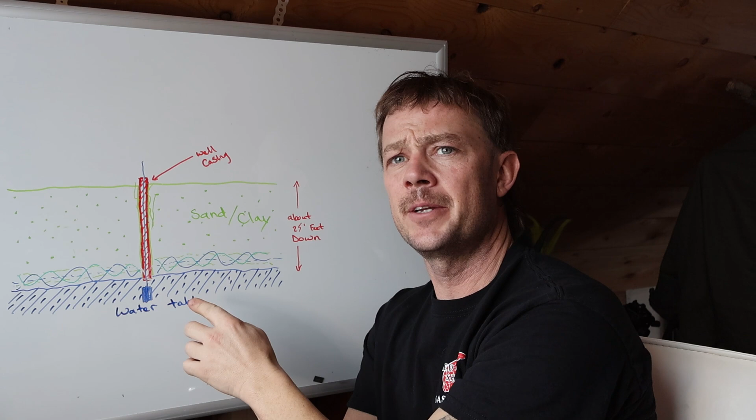The green is the sand and the clay, or earth, and the red indicates the casing. So the red is the 4-inch casing that I put into the earth at the end of this video. The blue indicates the water table, and where you see the blue and green mixed together, that's right at the top of the water table where the sand and water are just starting to mix. That's where, when you start boring into the earth with the manual post hole auger, it starts sloughing. And as soon as you get into the water table, it's next to impossible to get anything else out. You can only go down so far into the water table, and that's it.

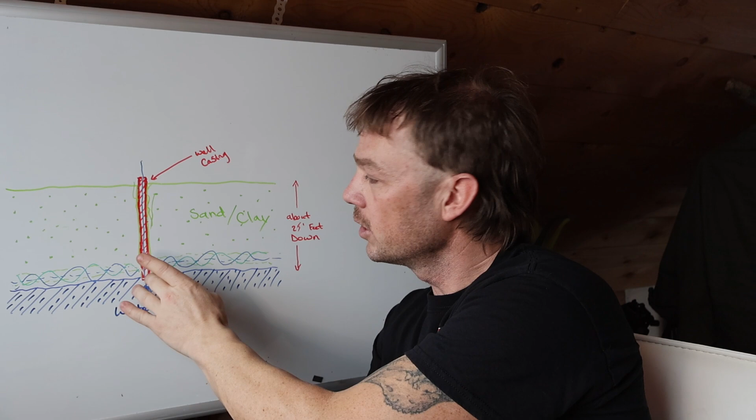So once we bored all that earth out, which was around 20 feet, we put the well casing in, indicated here by the red. The next step, once the well casing has been put in, is to decide what kind of pump system you're going to put in.

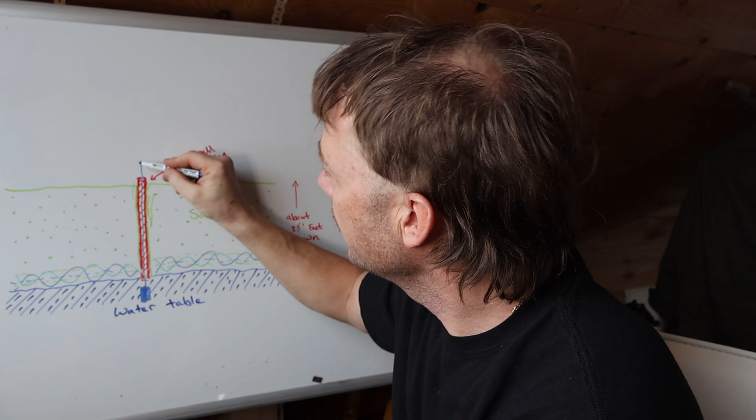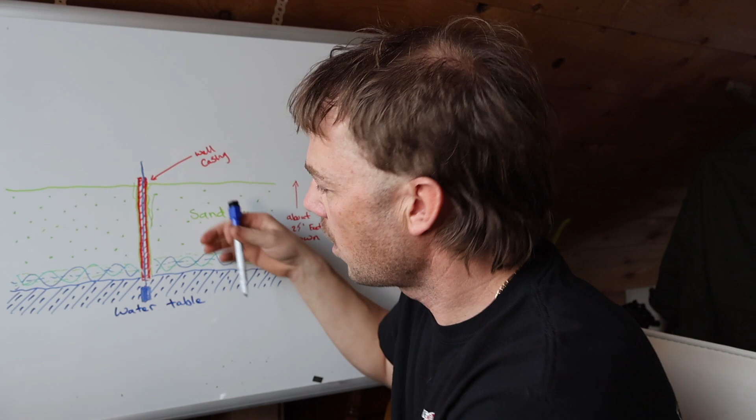I have a jet pump system here, which is a sucking pump. With that kind of system, you would use a sand point. I'm going to use this blue marker to indicate the sand point. It's going to be pushed into the well casing, it just slides down. I think it's 1.25 inch pipe, and a sand point is about 24 inches long. It looks like a big steel sharp point with some mesh around it, which allows water to go into the sand point through the sand.

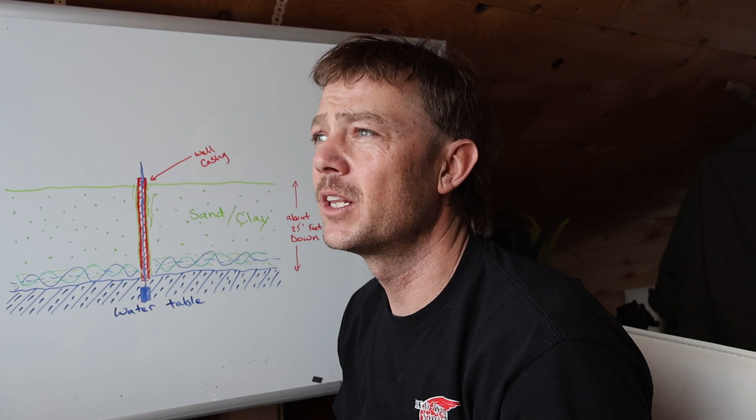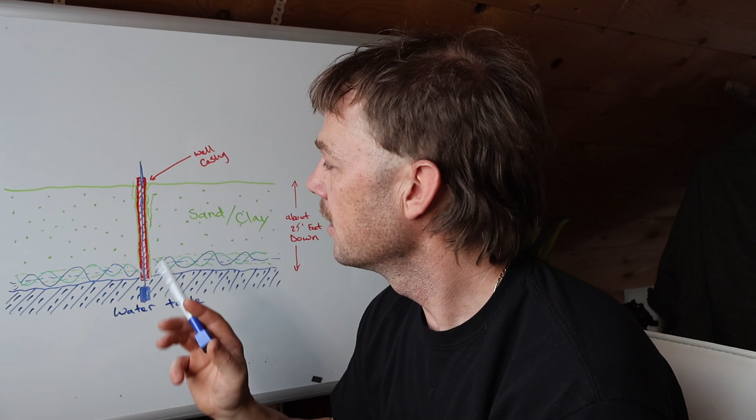Once we put that sand point into the earth, about 20 feet, we're going to hit the sand and have to pound it in with a T-bar post hole pounder. You pound it in no deeper than 25 feet, because with a shallow well and a jet pump, you can only go down to about 25 feet. If you're going down, say, 30 or 40 feet, a jet pump isn't probably the best type of pump for that application.

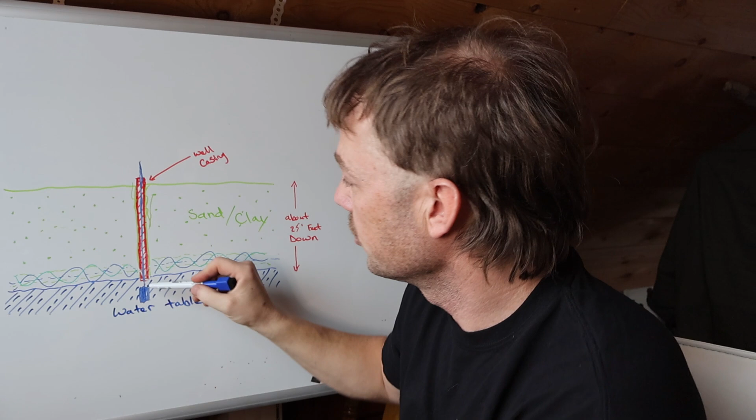I'd rather use a pump like a submersible pump that pushes the water up into the line and into the house. So I hope this little demonstration clarifies exactly what I had done in the greenhouse.

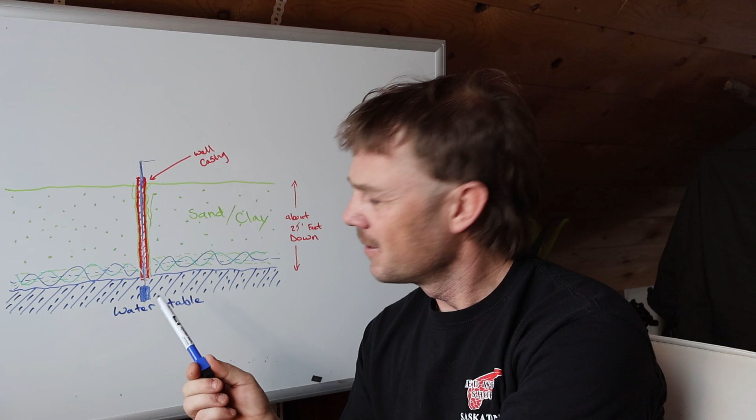But yeah, so just nice, fresh, clean drinking water in your house. I know there's a lot of talk where people don't really know if they want to go off grid, but they're not really sure how or the steps to really becoming self-sufficient and going off grid. This is my 4th winter here alone in the woods. It's been quite a journey, but it's been amazing.

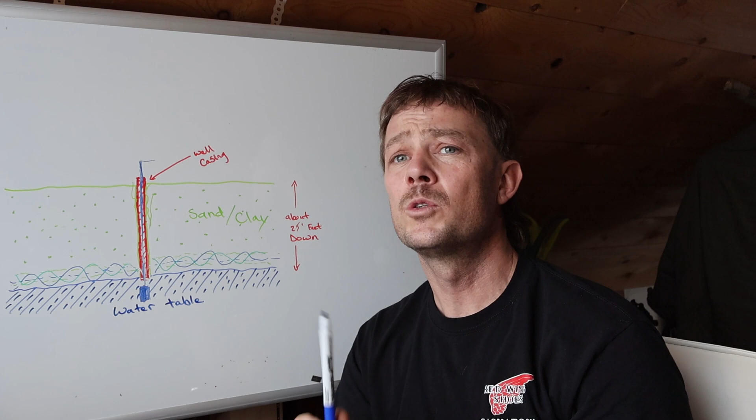If you guys are thinking about going off grid or stepping back from modern day life, I highly suggest you weigh out these options. I'm going to be posting another video on 10 things you need to consider before you decide to go off grid. There's a lot of different things to think about.

But anyways, let's hop into this video of me installing the well casing, and you'll see, oh, my fancy light died. It's on now, it's off now. Oh, the computer, dang computers, went into sleep mode. Sorry about that.

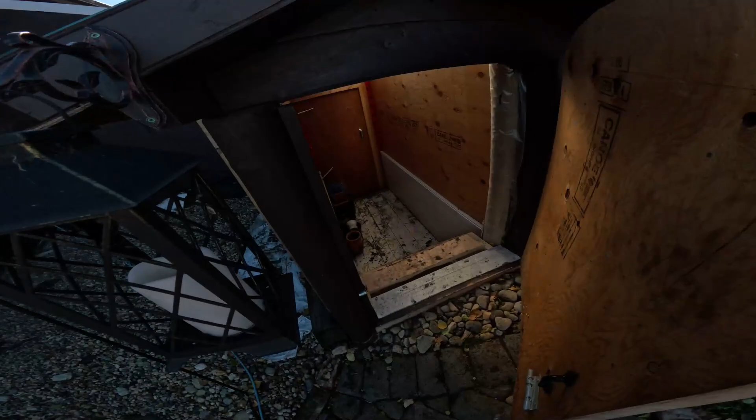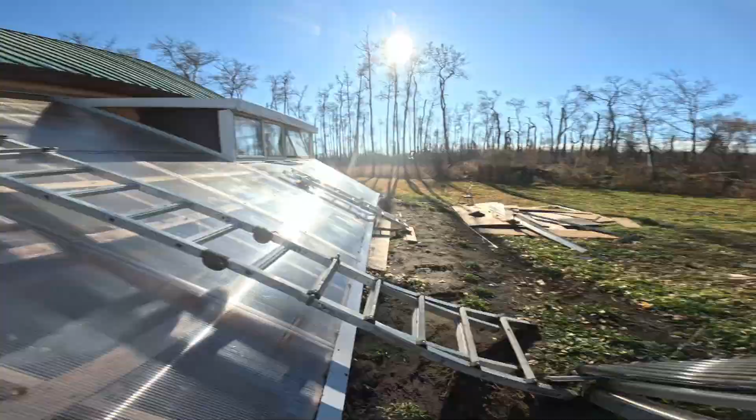Get this job done, do-it-yourself well project, Saskatchewan style. Alright, so we're coming out of the airlock there. Got to get up here to remove this panel, this one right here, so that the pipe extensions can come out of the roof. So we got to take that off before we get started. Alright, let's get this camera set up so you guys can watch what I'm doing.

Alright, so that's off. That gives us access to get the pipes through.

So when we're boring into the earth, a lot of people take water for granted and the importance of it. I know most people just turn on their tap and magically the water flows out, but it does come from somewhere. Mine comes from about 25 feet, that's how deep my big well is, but for right now we're just doing a temporary water solution fix. So let's get to it here.

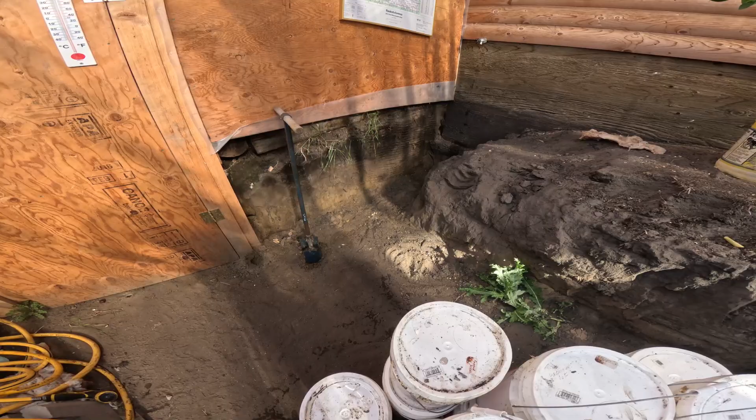These panels for the greenhouse, I'll give you a little scoop, are really nice quality product out of Calgary, had them shipped in from my local Home Depot. They're 4x8 sheets, very nice product, polycarbonate and stuff. So I think right here we're gonna do some work, right there is where we're gonna bring the handle through.

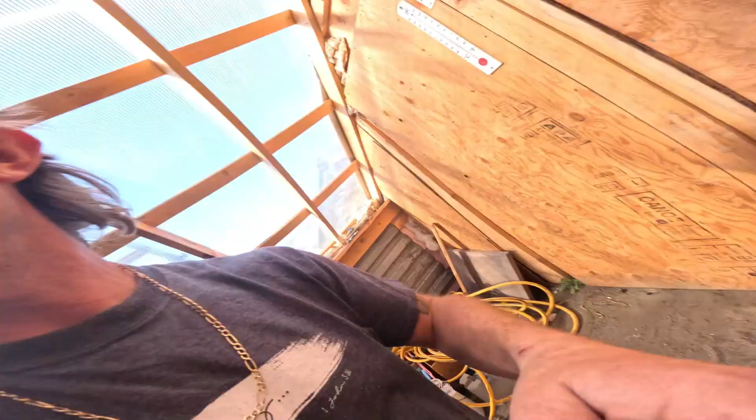Let's bore a hole in here and see if we hit water. Lord willing, we'll have some good water there. So alright, let's get to it.

This takes a bit of muscle, and it's definitely a good workout. So you'll see I'll probably be sweating quite a bit, but that's good. That's what keeps a guy alive, working hard and proper diet, nutrition, and healthy living. So let's get to this.

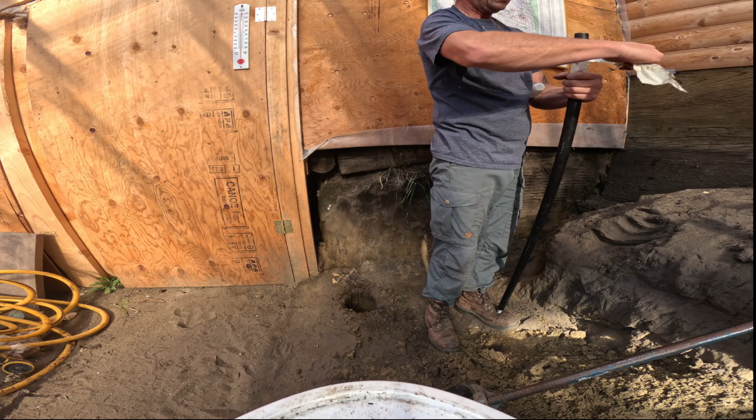This 3/4 inch pipe cut up into different length sizes for this job. I went and got that this morning from my local hardware store, got 30 feet in total. I'm not going down 30 feet, maybe, I don't know, we'll see how much it starts sloughing in.

So these are threaded, the ends of these are threaded on here, so we're gonna pop this one off. You'll need, if you're thinking about doing one of these, two pipe wrenches for this job.

Oh man, that baby is on there. Okay.

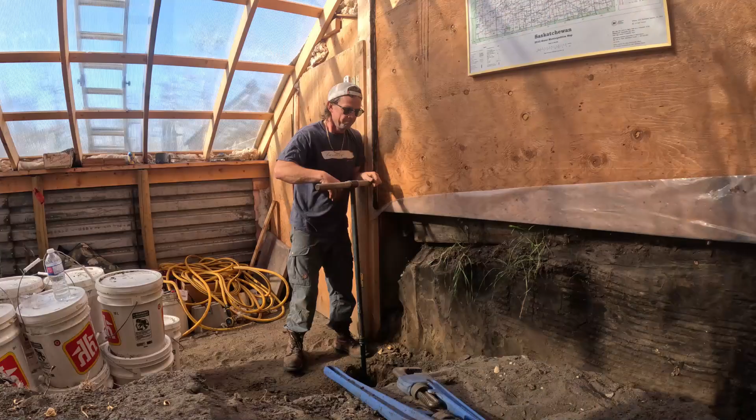You're curious about the costs. I had the local hardware store thread 3/4 inch threads on the different lengths of this pipe. They charged me $5 per length, which I didn't find that expensive. In total, the couplers and the pipe were $200 Canadian, which, if you're gonna put in a well or have access to water, I thought was relatively pretty cheap for a do-it-yourself project.

You can do this most places that have decent soil conditions. The Lord really blessed me up here where I have lots of sand and clay. See, nice clay can actually make bricks out of that if you wanted to, maybe we'll do that one day. But for today, we're just gonna go get us some water.

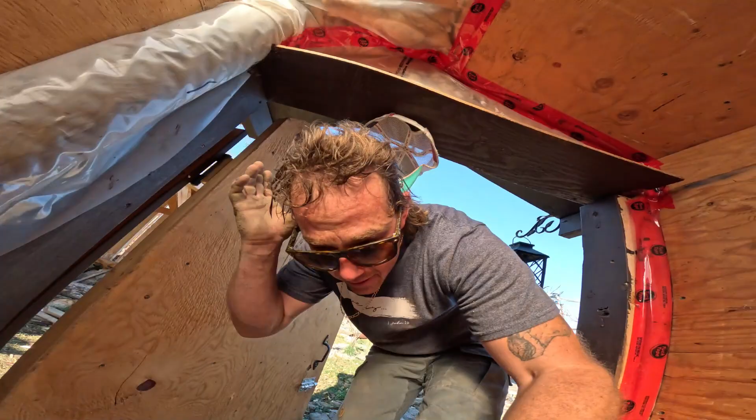Life is good, guys. Just getting a breath here from putting this temporary well into the sunken greenhouse. You can see the handle sticking out of my house here. Whew, what a workout. But I just wanted to give you an update. Hit my head there.

This is the airlock system for winter into the sunken greenhouse. All right, I'm pumped up. Life is good, life is good. It's hard, but it's good, right?

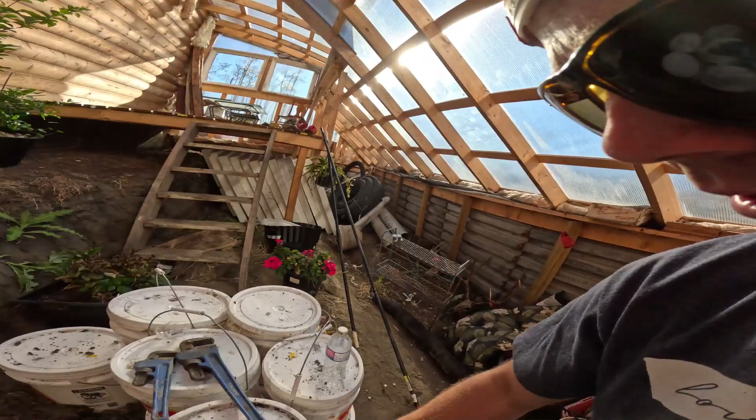All right, so what are we, 18 feet down. Just pulled my auger bit up out of the earth here. Give you a little idea, this is a little mining light here from a previous job I had.

Let's take a look down there. I don't know if you guys can see down there, but we're down there about 18 feet. But this is cool, you see, on the top, you can see water.

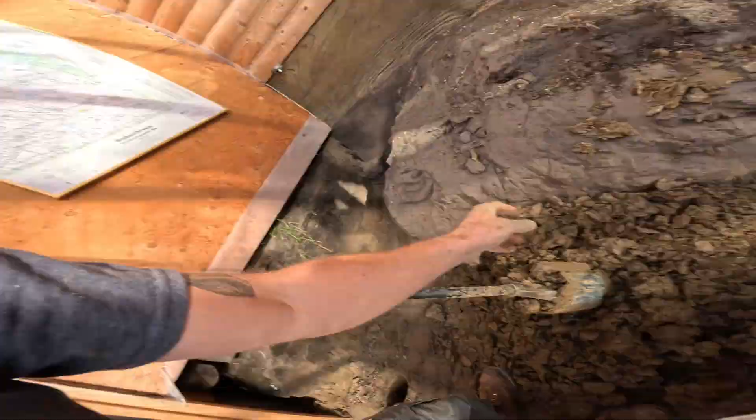That's exciting. When you're working out here all around, it's always important to protect your eyes, protect your body, because I'm always doing something physical or dangerous. Can be tough.

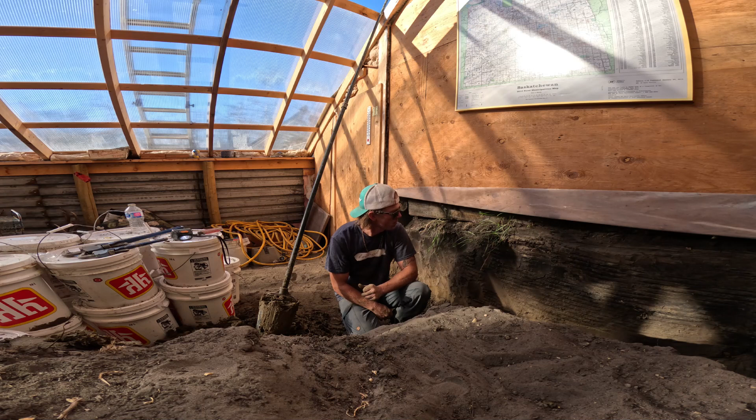All right, let's keep going. So when you get to this stage where you're just starting to get some water on top of your soil, it wouldn't be a bad idea to take a break if you can, or have somebody else help you. I don't really have anybody else. Cash, he's having a nap. That's okay, but for me, I don't really have anybody else to help me. I'm gonna keep going on this alone.

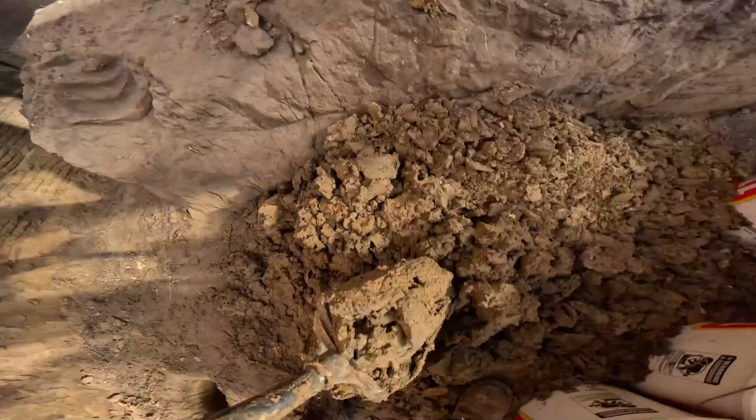But when you get into start hitting some water, then you gotta keep going, because your hole will eventually start to slough in. I can hear water down there. And as you go down, water starts creeping up the sides, all around. Look, oh yeah, look at that. See that? That's water.

Not much yet, but we'll get into it. But we have to make sure we have enough energy in the bank to really hammer through this last about 10 feet before we put the cribbing in. Now, my work was throwing out some old 4-inch, I think it was electrical conduit or something, but to myself, I was thinking, heck, that would make a pretty nice well cribbing.

I wasn't really expecting to do an episode on a well quite yet, but here it is. So we're gonna put a 4-inch well cribbing down this 6-inch hole. And then we're gonna put a little gravel around the outside, just for a little bit to kind of center it.

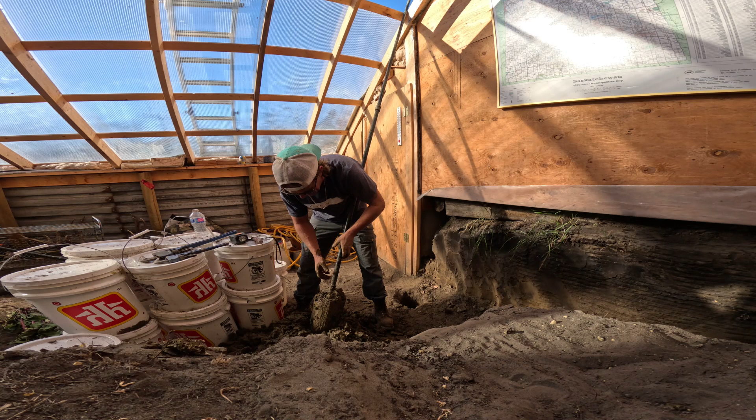Oh, the water is creating a suction down there, and that gets hard. I don't know exactly what this would weigh, but my guess, probably all the pipe and this big hunk of mud, wet clay I guess it would be.

I guess this is probably maybe only, I mean I have a couple 30-pound dumbbells in the house, it's probably about 30 pounds when it's loaded up, maybe not quite. But when you go down in there and that bit starts to grab suction on the sides of the wall of your hole, it makes it hard to pull it up.

But it's just temporary. Little pain, a lot of gain. Little pain. Just using a flat head screwdriver to muck all this clay out of here.

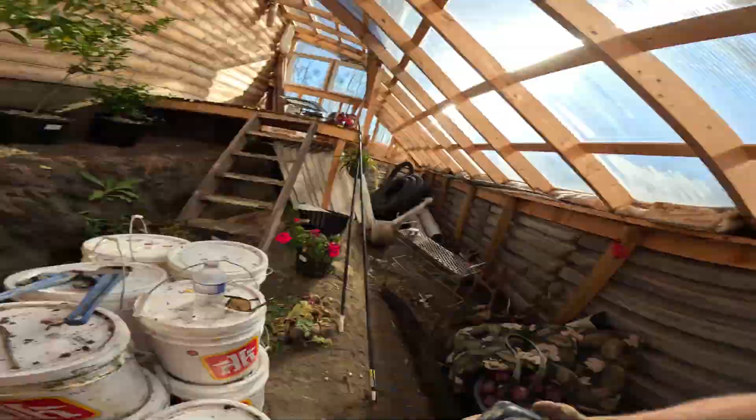I was gonna charge this camera, but I wanted to show you guys something here quickly down the hole. I don't know if you can see it down there, but there is water building up down there.

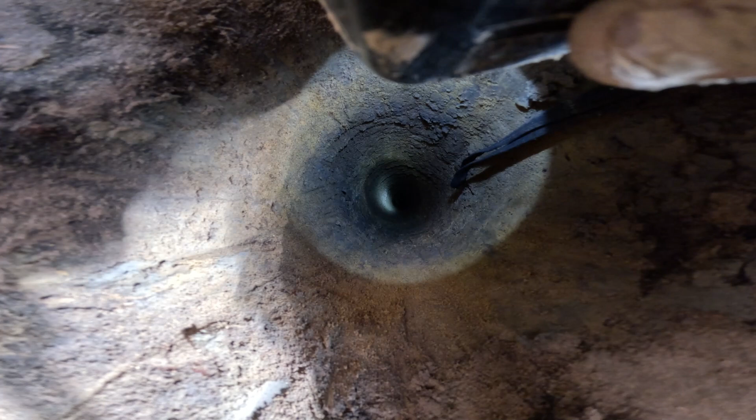All right, for real, now I'm gonna go charge it. But that's exciting, I wanted to show you that we had some water. I'm gonna go charge this up.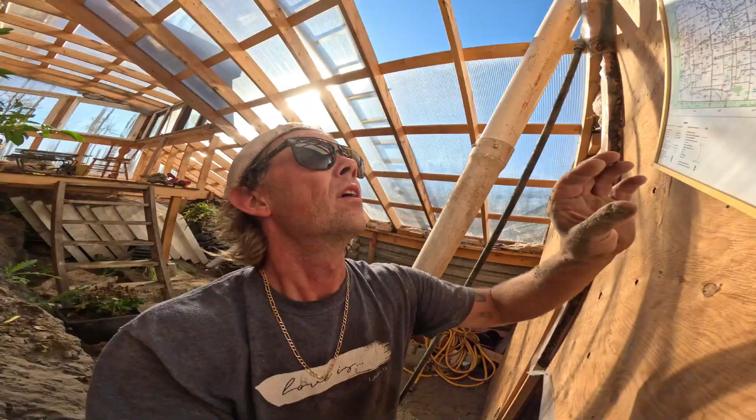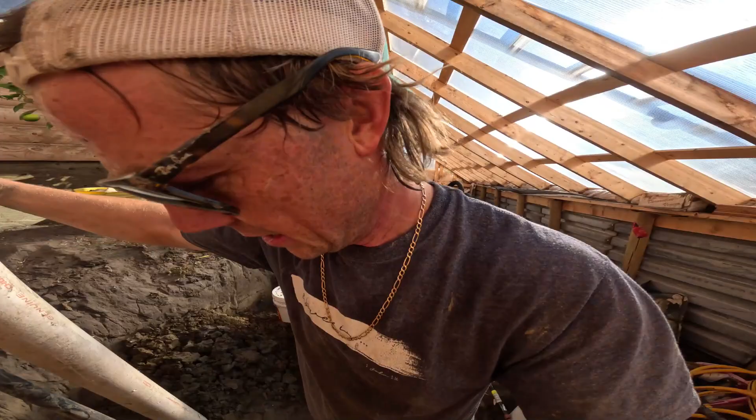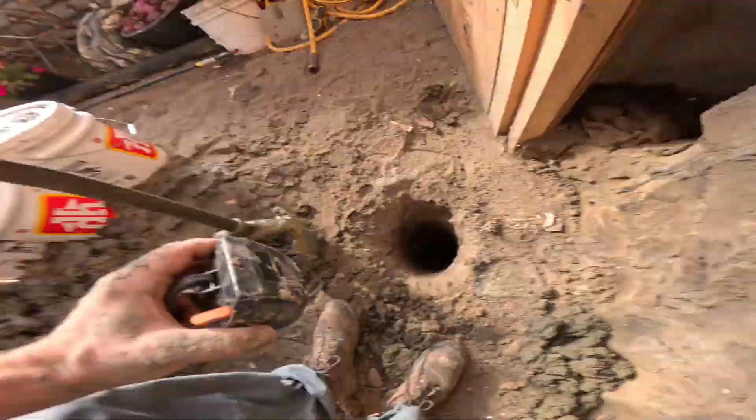All right, so this is the 4-inch cribbing we're gonna use. We're down 20 feet-ish, so it's really filling up full of water. It's really sloughing in the sides, and I have to get this cribbing in before we start losing it. I'm gonna try and get a little bit more out. So you can see down there, there is some good water in there.

You can hear it. I don't know if we're gonna be able to slough any more out of there, like take it out with the post hole auger. We're gonna try a little bit, but I think we're gonna get this cribbing down in here. I'll try one more. You can see.

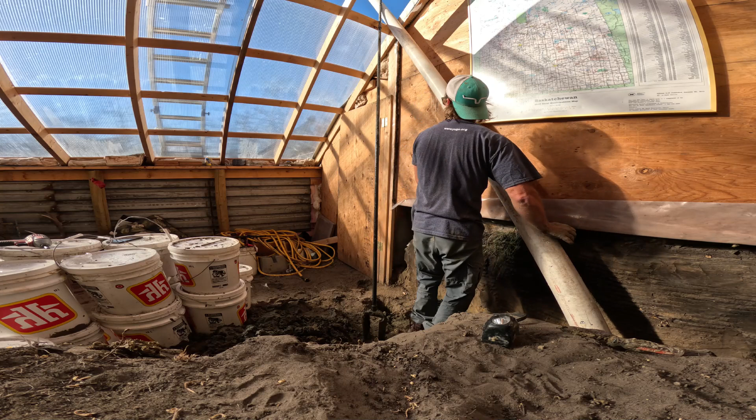Goes down nicely, but oh man, I want to lose the chain. Nothing stays in there. It's time to put this in.

Thank you, Lord. All right, I'm gonna go grab some more pipe, see if we can get a little bit more on there. That's exciting, that's big.

Everything works out. Okay guys, woo! Casing's in, the cribbing. Non-stop going, start to finish, maybe an hour and a half. We've successfully put a well in.

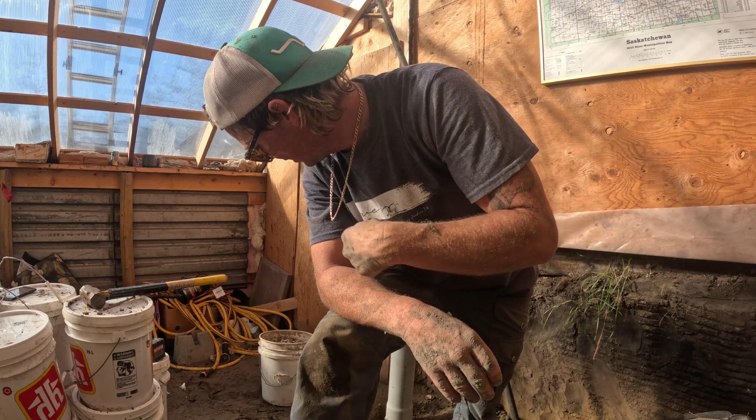All right, so we just went and hauled this gravel out here. It's clean, we're gonna go bucket this into around that cribbing or casing, whatever. Now some of you guys are gonna be like, it's not the proper way, but I'm not a professional. But I do know that if you were to get a big well put in, you'd be into thousands of dollars. This cost me, the cribbing was free due to recycled goods, the gravel I had around the house, and the pipe extensions were about $200.